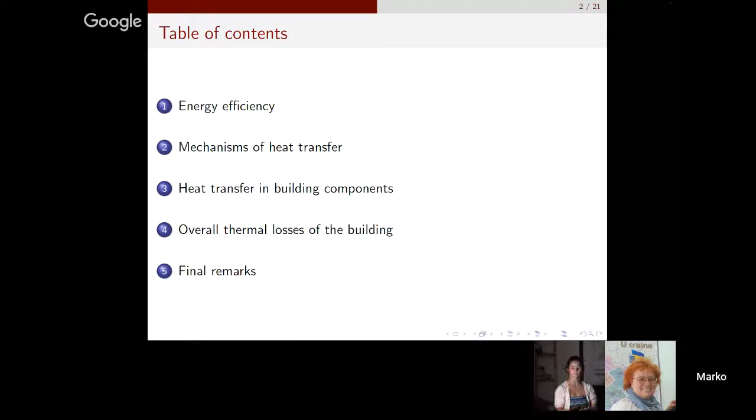In the third chapter, we will join these mechanisms of heat transfer together to understand heat transfer in individual building components. And in the fourth chapter, we will join these individual building components together to understand the complete thermal losses of the building. So we are building a pyramid, going from the basement to the roof. And in the end, in chapter 5, I will show you some final remarks.

Okay, so there are many problems related to energy. Some are very obvious. For example, if you are spending a lot of energy, you're also spending a lot of money. So big spending of energy means big financial cost.

The second problem is, of course, limited resources. This is a global problem. We all know that fossil fuels like gas, coal or oil are limited. So we know that we cannot keep spending at this pace.

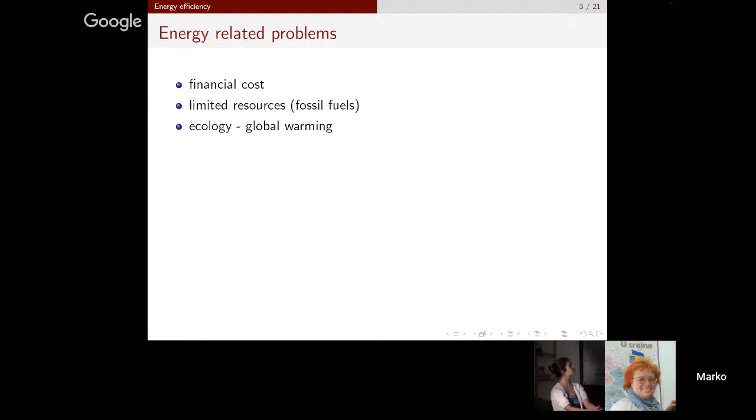And the third problem is ecology. A very popular topic today in the world is global warming. Of course, there is a lot of discussion and controversy about it. Some people, including the President of the United States, claim that this is a big hoax. But my counter-argument is that even if it was a hoax, there are still plenty of other reasons why we want to do something about spending energy and using other types of energy.

First of all, there is energy independence. I think this is an important topic in the European Union, and it is an important topic in Ukraine. And of course, don't forget that this energy efficiency also creates new kinds of jobs, especially local jobs—I will tell you about this later. Of course, it is also important that we get a better, cleaner environment.

I took the liberty to change this cartoon a little bit; I added the last one. Of course, you all know that there are certain countries which live from selling fossil fuels, and one of those countries is very hostile to Ukraine. So Ukraine has many things to be concerned about regarding the spending of energy.

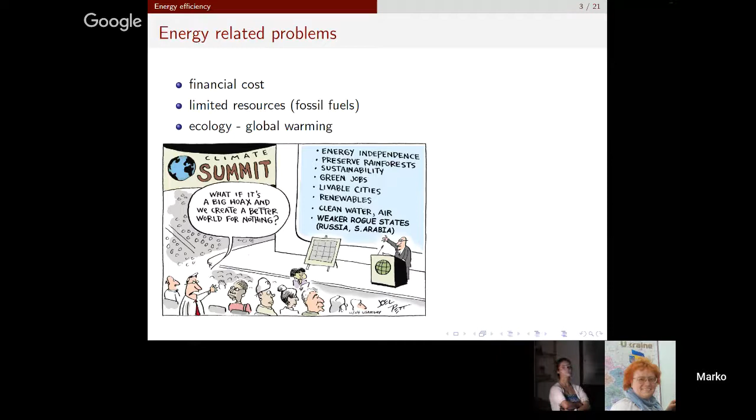Okay, so maybe I will provide you in the beginning with some solutions to energy-related problems.

The most obvious solution is new energy sources. We can use renewable sources like hydro, sunlight, wind. Of course, in the present technology, these sources might not be enough to replace fossil fuels. Then we have nuclear energy sources, fission, which we are already using a lot, but it is problematic because we have radioactive waste and don't know what to do with it. We also have fusion, but fusion is technology of the future. So these new energy sources are still, in many terms, future solutions.

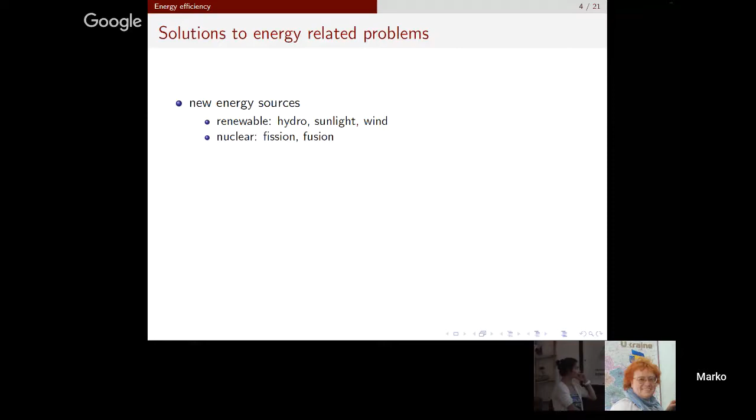So what are current solutions? What can we do today? Today, we can increase production efficiency. First of all, we can recycle materials. It is much cheaper to make copper from waste copper than from copper ore. So when you produce plastic, metals and everything else, using waste materials is cheaper and needs less energy than producing from basic sources.

The second possibility is reusing energy. A typical situation is power plants. We produce electricity, and these power plants have waste heat, which we can use to heat residential areas and houses. This is called cogeneration, combined heat and power, CHP. This is already common in the European Union, and I think even in Ukraine. A little more futuristic is tri-generation, because you can also use this waste heat to cool residential areas.

So what is the point? The point is that we use the same energy twice, to produce electricity and also to heat residential areas. The final point is consumption efficiency. We all know that if we use public transport, we use less energy than if we travel individually by car. This is a very common situation in Europe.

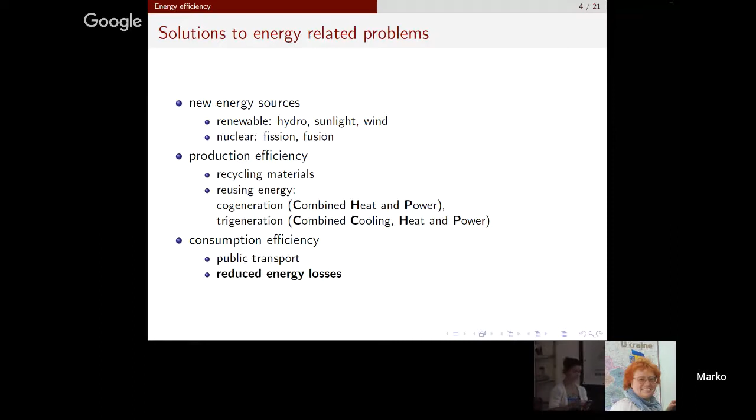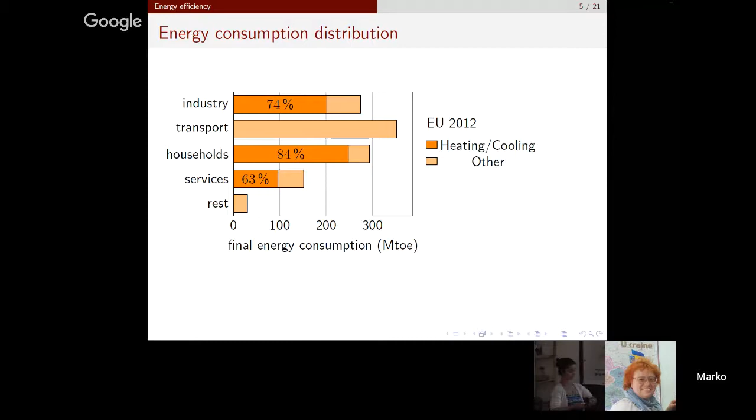Let's put some numbers into this discussion. This is data for the European Union, 2012, by sector. We see that most energy is used by the transport sector, then industry, households and services. This is not very surprising, but what you will find surprising is this: you see 84% of energy for households is used for heating and cooling. For industry, 74%. Services, 63%. If we add this all together, we see that at least 50% of all final energy in the European Union is consumed for heating and cooling.

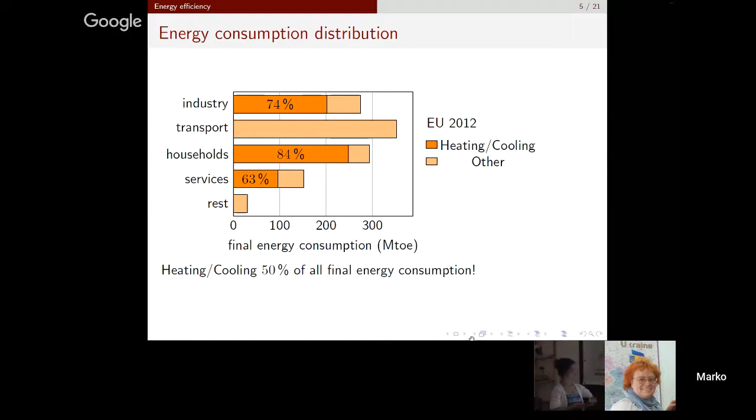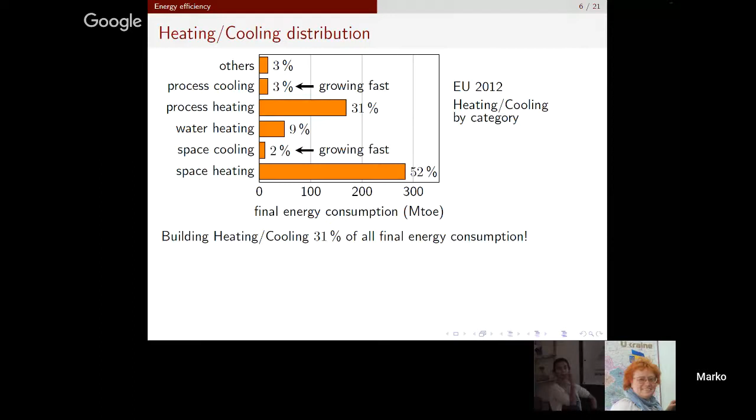If we add this all together, I would like to point out that space cooling and process cooling are growing very fast, because today air conditioning is completely normal and usual everywhere. About 20 to 30 years ago, it was not so usual. So people are starting to cool their houses, and space cooling and process cooling are growing very fast. All in all, building heating and cooling, energy used by buildings, is 31% of all final energy consumption.

So what is important here? Which are the important factors that can contribute to larger or smaller consumption? First of all, there is efficiency of the building thermal envelope — how much energy we lose through the walls. This is very obvious, and it is the most important point in our lecture.

The second is efficiency of heating and cooling equipment. You all have boilers or maybe furnaces to warm your water and buildings, and if these devices are old, they don't have high efficiency, so they also have to be replaced from time to time to keep high efficiency.

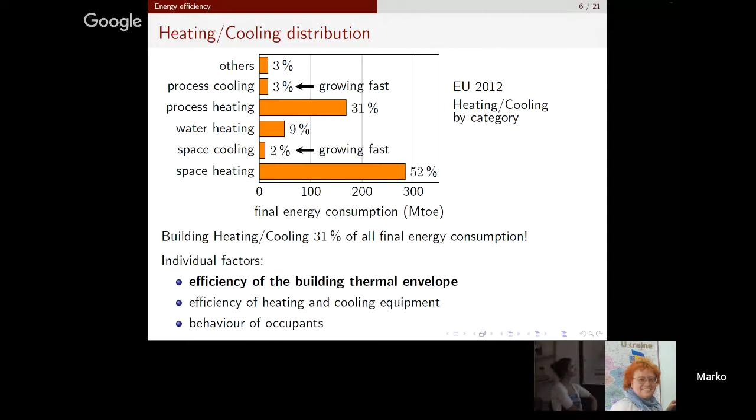There is also the behavior of occupants. If you reduce the temperature in your room or apartment by a few Celsius degrees, then you lose much less energy. This is not very popular, but it is also a possibility.

So now that I've described these problems, we will concentrate on losing energy through the walls, losing energy because of the house envelope.

Okay, I will not go into big theory, but I must say that there are three mechanisms of heat transfer. The first one is conduction. So what is conduction about?

The heat is transferred by particles, and these particles cannot travel. They can only oscillate. So when they oscillate, they collide between themselves, and by these collisions, the heat is transferred from the hot side on the left to the cold side on the right. And of course, where are the particles that cannot travel? In the solids, for example in the wall or in the glass, you have particles that cannot move. They can only oscillate, and there is only the possibility of conduction.

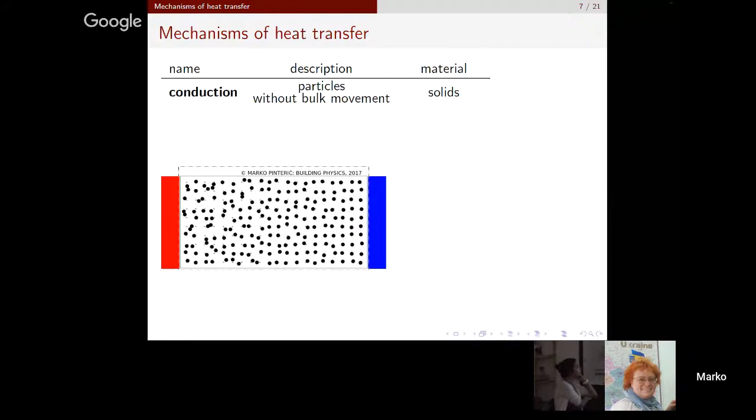The second mechanism is convection. Again, we have particles, but in this case particles can move, they can travel. For example, in this case particles are circulating within some kind of place, and they are transferring heat from the hot side on the left to the cold side on the right. Where is the possibility that particles can move? In fluids - in liquids and gases, particles can move. So this convection appears generally in fluids.

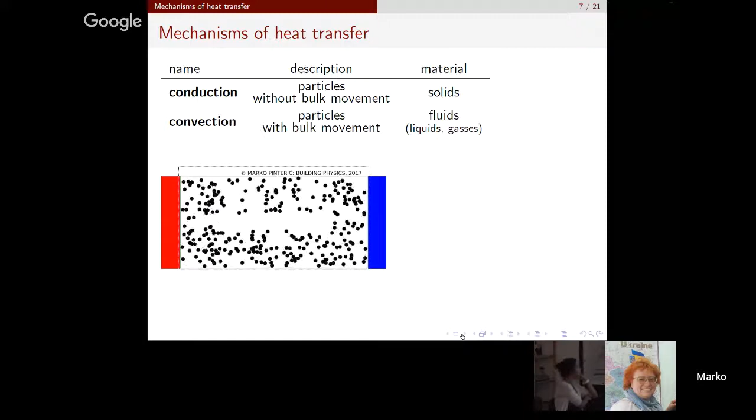And we have the third mechanism of heat transfer, and this third mechanism is radiation. So what is radiation about? Radiation is about electromagnetic waves, so particles are not necessary. Electromagnetic waves are emitted by practically all bodies in the universe. First of all, where can radiation appear? In empty space, because electromagnetic waves can travel very easily through empty space, either through vacuum or through air.

There is one important thing to know about radiation: because all bodies radiate - the sun radiates, we are radiating - it means that energy, or heat, goes both ways. Energy goes from the hotter side to the colder side, and energy also goes from the colder side to the hotter side. Electromagnetic waves are traveling in both directions.

Of course there is some difference, because bodies at higher temperature radiate more, and bodies at lower temperature radiate less. Also, as seen in this presentation, bodies with high temperature radiate short wavelength - you see these short wavelengths - and lower temperature bodies radiate long wavelength. Because bodies with higher temperature radiate more than bodies at lower temperature, this means that the net heat transfer goes from the hotter body to the colder body.

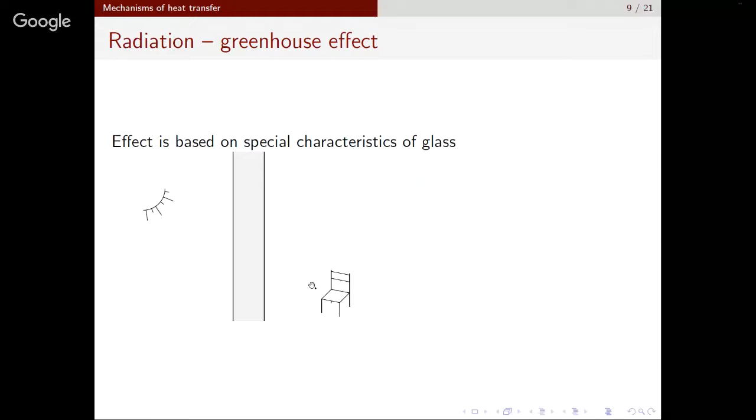So the greenhouse effect is based on a special characteristic of glass - we have glass here in between. A typical situation is, for example, you have the sun on one side of the glass and you have a chair which is in the room, and you put this chair next to the window. So what happens is we know that the sun has a temperature of about 5,800 kelvins.

So this means that the sun radiates short wavelengths, visual light. This visual light can go through the window practically unobstructed.

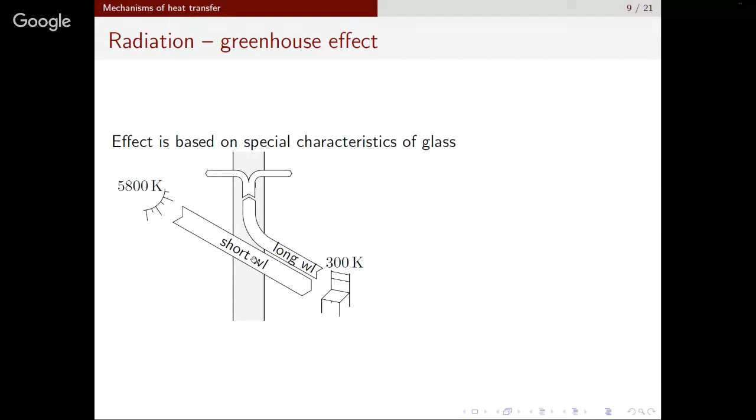On the other hand, we have a chair that has only 300 Kelvin. This chair is heated by the sun. If you put a chair next to the window, you will see that it heats up and gets a higher temperature, but it only heats up to about room temperature, which is about 300 Kelvin. So it has low temperature, and because it has low temperature, it only radiates long wavelengths.

And these long wavelengths cannot go through the window. They are absorbed by the glass, and part of this energy is returned back to the room, and part goes into the environment. So radiation can go practically unobstructed into the room, but energy cannot completely leave the room. Transfer is unobstructed only in one direction.

The same greenhouse effect is valid for the planet Earth as a whole. The function of glass is played by the atmosphere, or more particularly, greenhouse gases like carbon dioxide and others. This carbon dioxide functions like a glass: it lets radiation from the sun in, and it obstructs radiation from going from the Earth back to space. This is the real explanation of the greenhouse effect.

Okay, let's go now. We were introduced to the basic mechanisms of heat transfer, and now we will join these mechanisms to understand how heat is transferred through the wall.

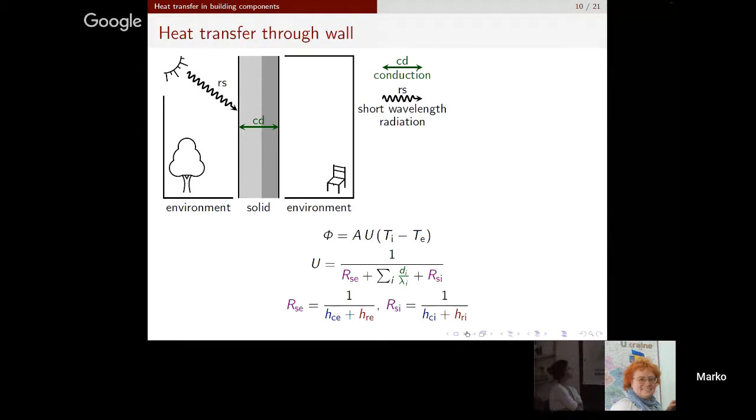Except for conduction, we also have short wavelength radiation. In the case of a non-transparent wall, short wavelengths cannot go through it, so they are stopped by the wall. More interesting is the long wavelength radiation: we have thermal exchange between the external environment and the wall, and thermal exchange between the internal environment and the wall. Finally, the missing mechanism is convection.

Convection appears only where you have gas—you have air inside and air outside. So convection can appear both inside and outside.

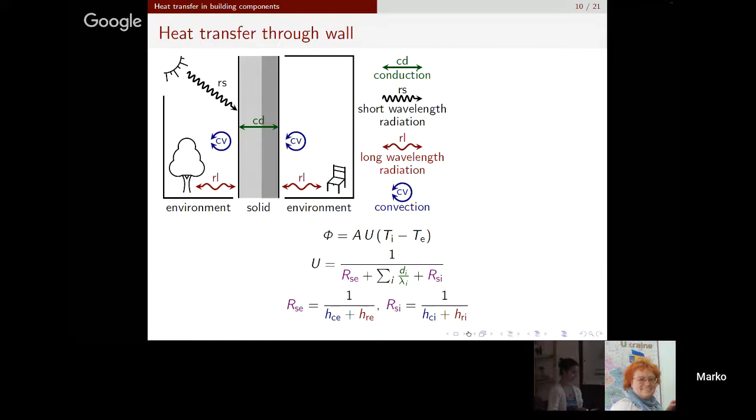A more interesting situation is the double glazed window. This is why I put the previous slide, because this is a little bit more complicated, but also more interesting. First of all, we start with conduction. Conduction can only appear in the glass - double glazed window means glass, and between the glass we have some space. And of course, we have the external environment and the internal environment.

Then we have short wavelength radiation as before. Unlike before, short wavelength radiation can go through the window and it can warm up the chair, for example, or the wall in the room. Then we have long wave radiation. Long wave radiation also appears in the airspace because it transfers heat between one glass and the other glass - heat between those two glasses is transferred by long wave radiation.

And finally we have convection. Convection also appears in the airspace, and because in the airspace we have some gas - usually in all windows we have normal air - this air is circulating between the two glasses, and by this convection, heat is transferred between the two glasses.

So this formula is changed a bit. You see, we have external surface resistance, conduction through one glass, and thermal resistance of the airspace. Thermal resistance of airspace is combined of convection and radiation. We have heat transfer due to conduction through the second glass, and we have internal surface resistance.

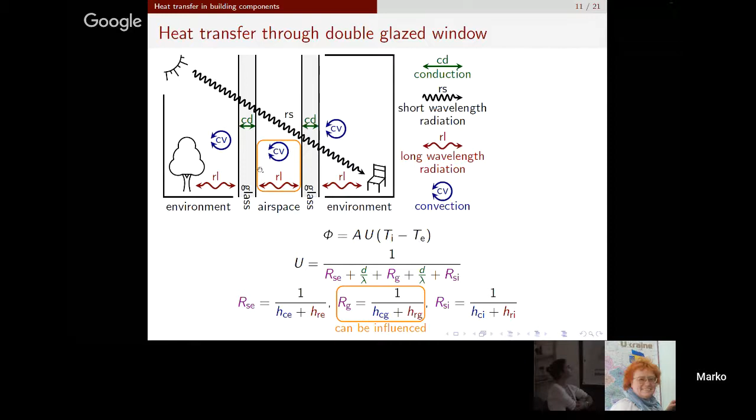Of course, the other possibility is that we add another glass - we can have a triple glazed window. I will talk about this at the end. So how can we reduce radiation and convection between the two glass layers? Let us see this in the next slide.

So this is the normal situation: we have two glasses, and air between the glasses. We see that thermal transmittance is about 2.8.

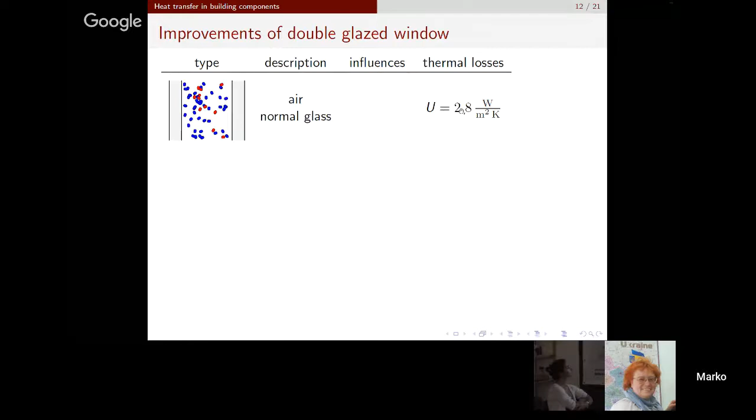What can we do? First, we can replace air with argon and other noble gases. There is big physics behind this, but let me try to explain simply: argon atoms are much heavier than air molecules, and argon has fewer degrees of freedom, so they cannot transfer as much energy. So by putting argon instead of air, we influence and reduce convection, and by replacing air with argon we get 2.7 for thermal transmittance.

The second possibility is that we put some metal coating on the glass - this here is metal coating. What is metal coating? It's a very, very thin, micrometer-thin layer of metal. You can still look normally through the window, but because of this coating, the long wavelength radiation will be completely reflected. This influences radiation. If we put this metal coating on one side, we get a thermal transmittance of only 1.7 - so we reduce radiation.

Of course, we can combine both - we can reduce convection and radiation - and we can get the typical window which is sold in the European Union.

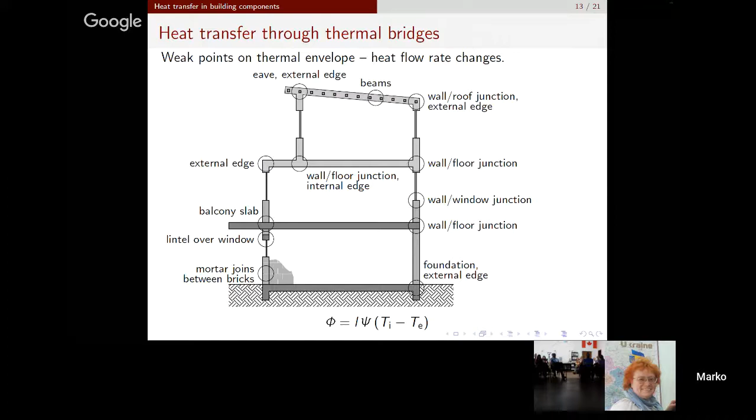And finally, we have the balcony slab. The balcony slab is a very, very big problem, and I will explain the problem of this thermal bridge in more detail. Now we will concentrate on this balcony slab.

So this is a cross section of the balcony slab. Let's say we have this reinforced concrete here, and we have walls from brick here and here, and we have insulation on the wall. What you see here is that there is no insulation. So if there is no insulation, heat will flow through this part which is not insulated - this is a weak point. Here we are losing most of the energy through this

reinforced concrete slab. You can see the effect of this thermal bridge on this picture. This is an interesting story because this building was additionally insulated just one year ago, and I took these pictures, and I was horrified to note that this retrofitting of the building was done very badly. You see they put additional insulation on the walls, but they still let the balconies

radiate a lot of energy. So you see balconies are very hot and they radiate a lot of energy, and of course because they are hot there is also larger convection. So we are losing much energy through these balconies because heat is avoiding the insulation - so we must do something about these balconies. This is not how it should be done. This is an example of how it shouldn't be done, and I will tell you more about these problems later in

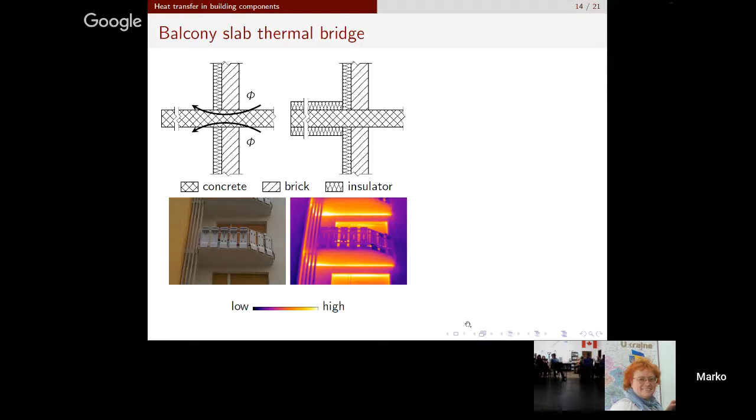What to do if you are only building a house? If you are building a house, then you can also use so-called load-bearing insulation elements. What is a load-bearing insulation element? This is actually an insulator, and there are steel beams that go through this insulation. So you have insulation and there are steel beams. Why steel beams? They are there so they can hold the balcony in place. And why insulation? Because now heat cannot avoid the insulation.

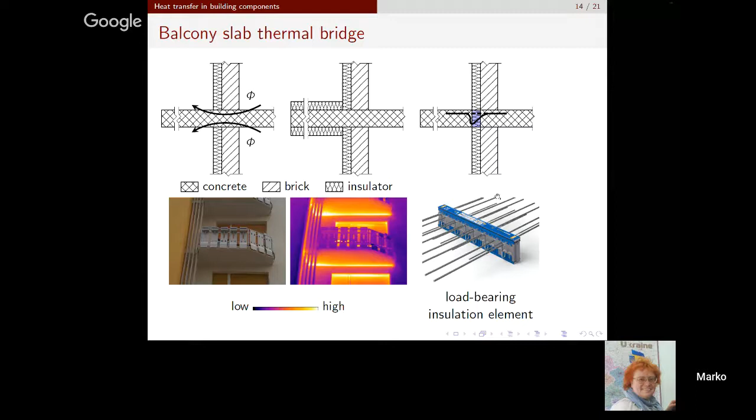So these things are very popular today. They were made in Austria - they are made in Austria and Germany, because Austria and Germany are the most advanced countries in the world regarding building physics. And unfortunately it is quite expensive, but this solution provides such savings in heat losses that I believe in the long term you gain money, not lose money, by using this load-bearing insulation element.

So now we were talking about individual parts of the building, and now the third part is we want to know the complete losses of the whole building. So we will see the individual contribution to the total thermal losses of the building.

So this is one example of a building. You see that we have different spaces here. We have conditioned spaces - these rooms are heated and cooled. And we have, for example, a garage - we are not heating and cooling the garage, so usually this space is called an unconditioned space. And of course this dashed line is the thermal envelope.

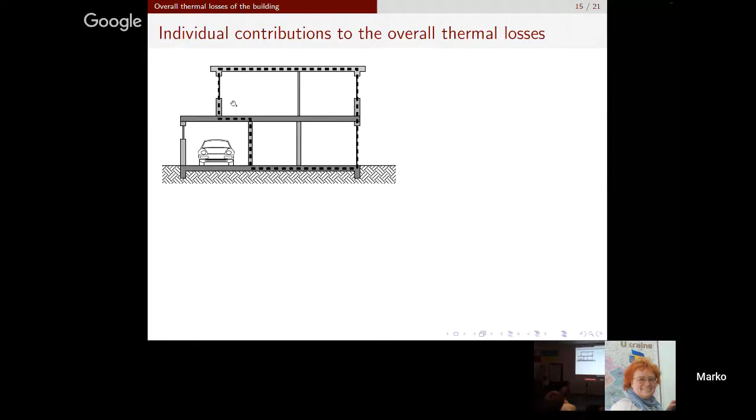By definition of the standard, it should be here. So what are the individual components of the thermal losses?

But direct thermal losses are not the only losses. We also have thermal losses through the ground, which also shouldn't be neglected. These thermal losses are much more difficult to calculate. Why? Because we have a third temperature. We don't have only internal temperature and external temperature, we also have temperature of the ground. So it is not so simple to calculate these losses to the ground, and I will not show you the formulas.

Okay, and then we have thermal losses through the unconditioned spaces. This is also difficult to calculate because we have the temperature of the unconditioned spaces. So, for example, you know that in a garage, the temperature is usually lower than in the rest of the house.

And finally, and this is a very important part, we have thermal losses through ventilation. And this is something that people often do not think about. So what is thermal losses through ventilation? What you do is you open a window, and when you open the window, the warm air from inside goes out, and you are getting fresh air, which is cold, from outside. So where are the losses? The losses are that you must warm up this fresh air which is coming from outside, to the temperature of the room.

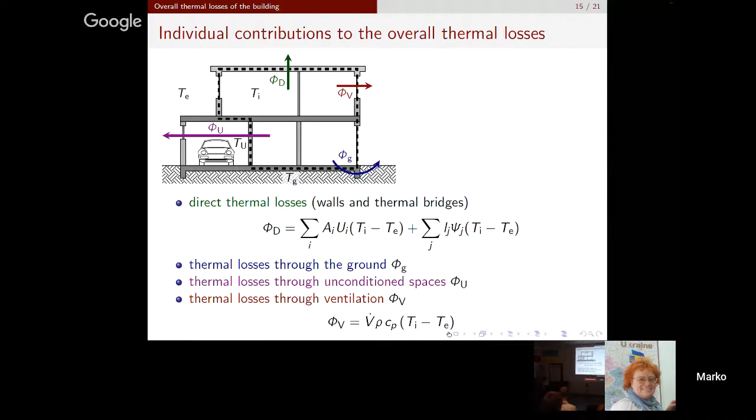So obviously these losses are proportional to the temperature difference, and they are also proportional to airflow, and of course they are also proportional to the thermal capacity of the air. So it is, from a physical perspective, a very simple formula. We will talk about this, the thermal losses of ventilation, later. So please remember this, this is very important. These thermal losses through ventilation are a very important part of the thermal losses.

Now I will show you two practical ways how you can improve efficiency, which are not directly connected to the insulation. First of all, we can use heat pumps. Heat pumps are usually a big mystery. People do not know really how they work, but they are not so difficult to understand.

So to understand this concept of heat pump, I will show you the difference between a typical boiler or furnace on one side and a heat pump. So what is the difference? We start with what you know best. This is a boiler or furnace. So what is the point of the boiler or the furnace?

You are using fossil fuel. You are burning fossil fuels, and by burning fossil fuels, you create heat. So what are you actually doing? You are changing the type of energy, from chemical energy of the fossil fuel into heat energy. And of course, usually this efficiency is close to 100% if this boiler or furnace is new. Of course, if it is very old, efficiency starts to drop. This is very important to know, that efficiency is slowly dropping as these devices are aging. So for example, if you put 3 joules of gas in, you get 3 joules of heat out. So you have 100% efficiency.

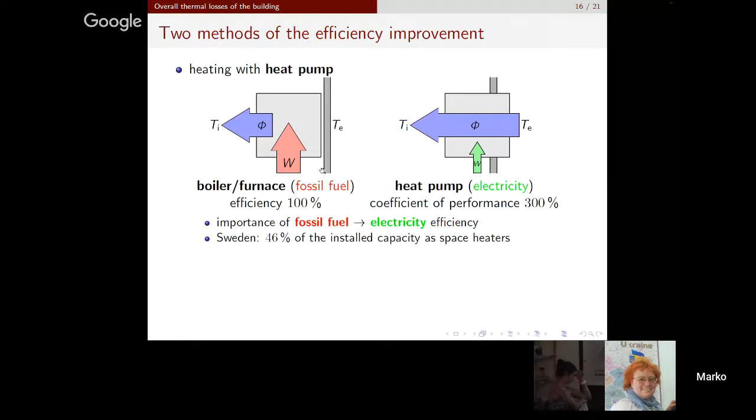Heat pumps make sense because in Sweden, 46% of installed capacity as space heaters is through heat pumps. So heat pumps are an important part of this mixture of different solutions to our problems.

The next important thing is the so-called recuperator. I will tell you how we can reduce losses due to ventilation. Instead of opening the window and letting hot air go out, we want that air to give some heat to the cold air coming inside.

Instead of opening a door or window, we force this air to go through a pipe. Here inside is hot air from inside, going through the pipe, and in the end it gets out. And we have fresh air from outside going through another pipe inside, and it is warming up.

Why is this cold air warming up and this hot air cooling? Because these two gases are in thermal contact. The hotter air from inside is giving heat to the colder air that is coming inside. This recuperator is the so-called heat exchanger.

This is a more clever word for the recuperator. Air-to-air heat exchangers have an efficiency of about 60 to 80%. So 60 to 80% of energy can still be recovered by recuperators.

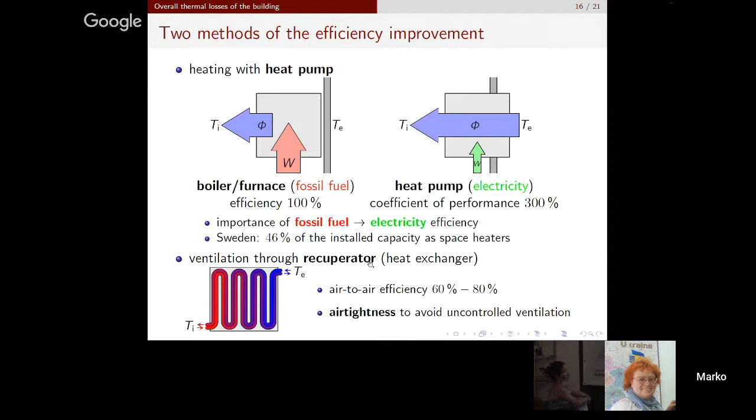So now I've told you about some interesting things that can improve energy efficiency of our building. Now we will put all these things together in building a passive house. But before I use these different devices and mechanisms we've learned so far, I must first define what is a passive house.

Maybe you heard about passive house. Passive house is a very popular term in Europe, and I see that not many people really understand it. I know that my colleagues, civil engineers, don't understand it. So maybe it is not a bad idea that we try to understand this concept of passive house.

The concept was made up by two professors, one from Sweden and one from Germany, because Scandinavia and Germany, as I told you before, are the most advanced countries regarding building physics. They asked themselves: we want to make some efficiency standard, a building efficiency standard that will be true for all the world. But how can you do this?

Because, you know, in Italy you have a hot climate, you don't need a lot of energy for heating. And on the other side you have, I don't know, Finland. In Finland you need a lot of energy for heating. So can we make a universal efficiency standard? Is it possible? And they found a way.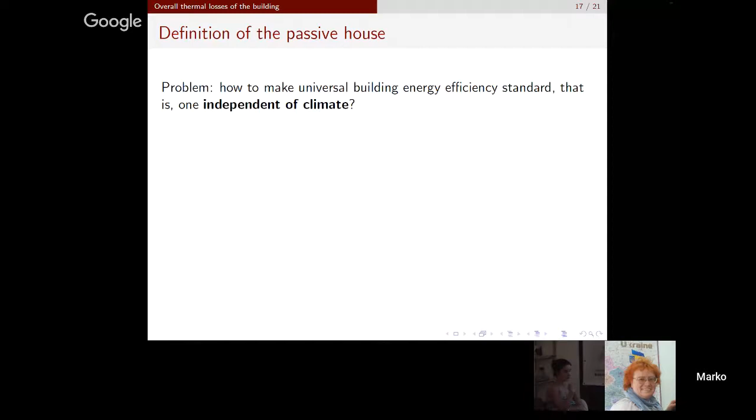Now I will show you the definition. A passive house is a building for which thermal comfort can be achieved solely by post-heating and post-cooling of the fresh air mass, which is required to achieve sufficient indoor air quality without the need for additional recirculation of the air. Very complicated, but it is not so difficult if I explain it in my own words.

So let's put some numbers into this. It is assumed that the minimum airflow rate is 30 cubic meters per hour per person, so we have enough fresh air for living.

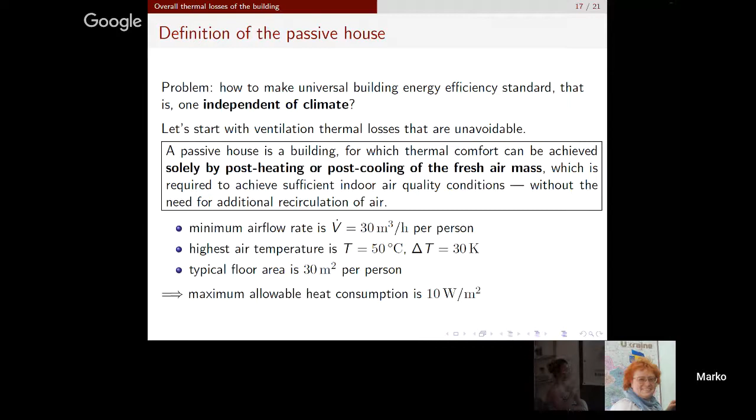It is assumed that air can be heated for about 30 kelvins. Why 30 kelvins? When air goes through the recuperator, it is heated almost to the temperature of the room, let's say to about 17, 18, 19 Celsius. And you cannot heat it above 50 Celsius, because above that temperature the dust in the air starts burning, and you get a smell. So you cannot go beyond 50 Celsius, which means you can only heat the air by 30 kelvins.

The third assumption is that a typical floor area is 30 square meters per person. This is normal for Germany and Scandinavia, but a little bit a lot for Slovenia or Croatia, because we are accustomed to smaller houses and don't have as much money. This is more of a cultural assumption, not really universal for the whole world.

But let's stick with this definition. So if we put these numbers into the formula I showed you a few slides before, we get that the maximum allowable heat consumption is 10 watts per square meter of the house.

And this is very small, really small. You will see that typically you have 100, or even a few hundred watts per square meter in a typical house that is not insulated well. So 10 watts per square meter is a very small consumption.

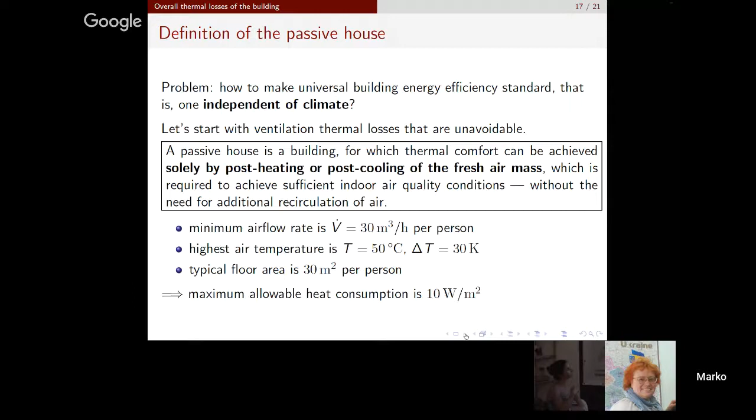So the question is, is it possible to do this? It is possible if we use all the knowledge I've shown you until this point. So let's start with an empty house, and we will design it to become a truly passive house. So what must we do?

First of all, we must have low thermal losses. This is very obvious, we must lose a very small amount of heat. First of all, we must have good insulation, thick polystyrene or thick mineral wool layers on the walls everywhere. Then we mustn't have any thermal bridges, so we must not have any space without thermal insulation, for example. Let's put it this simple way.

And finally, in a passive house, we use triple glazed windows. Making the glass thicker makes no sense, as I already told you, but adding another glass layer does make sense. Why? Because with a triple glazed window, we have 2 air spaces. The air space is the key. 2 air spaces are better than 1 air space. 3 glasses is the same as 2 glasses, but 2 air spaces are better than 1.

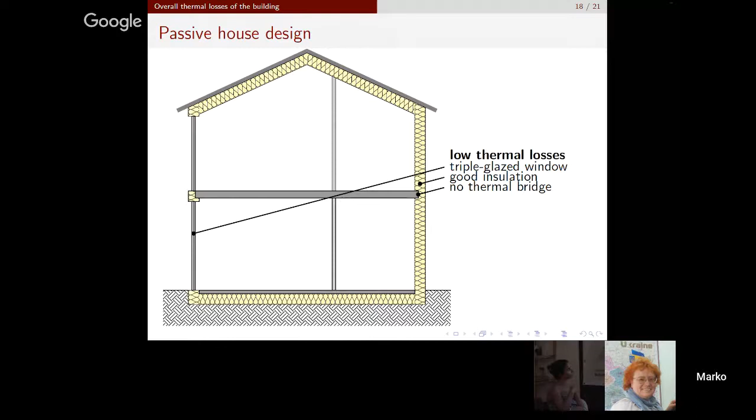The second thing is we need efficient ventilation. I already told you, we need recuperators, we need air tightness, so no air goes out or in uncontrolled. We need a recuperator: outside air goes through the ground and then to the recuperator, where it is heated to about 18 Celsius, then post-heated to 50 Celsius, and then let into the rooms.

So you see, you don't need radiators because the air is heating the building. You don't need a water system for heating, it's an air system that heats the building. So you don't need one whole system, this is also a possible saving. And you have exhaust or waste air, which goes through the recuperator and cools down before leaving.

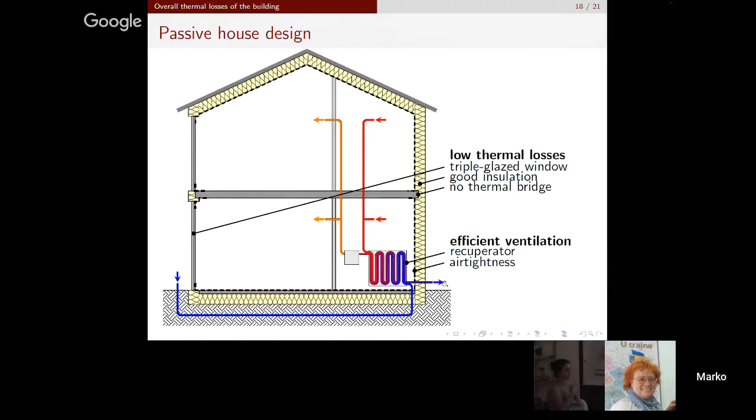And finally, we need efficient heating. First of all, we will heat the air not with a furnace, but with a heat pump. And of course, we need solar gain, what we need is the greenhouse effect, we are heating houses with the greenhouse effect.

We have big glassy walls or big windows facing south, because that's where the sun is. Of course, in Australia they need the north direction, but in Europe, in Ukraine and the European Union, we want big glassy areas facing south, so we get additional heating from the sun.

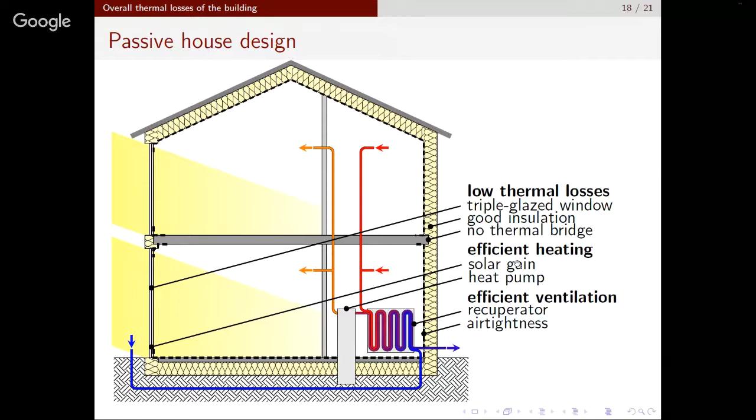Okay, so this was the technical part. I will finish my lecture with some final remarks. I will tell you about some legislative incentives in the European Union, which have been made in order to reduce thermal losses in buildings.

The problem was recognized, of course, first in Germany and Scandinavia, and then through the European Union it is recognized as a very important problem in the whole European Union. This is also important because Ukraine, as far as I know, wants to come closer to the European Union, so it is important that you know something about the trends in the European Union.

First we have a directive, 2010-31, on energy performance of buildings. What does the directive say? It says that member states must set up minimum energy performance requirements. Not very smart, but of course, people are forced to put more insulation on the houses. If you want to have a building permit, you must have enough insulation.

By 2021, all new buildings should be nearly zero energy buildings. All major renovations must be done with an energy performance upgrade. So if you are doing renovation, why not put an additional layer of insulation? This is obviously a logical step.

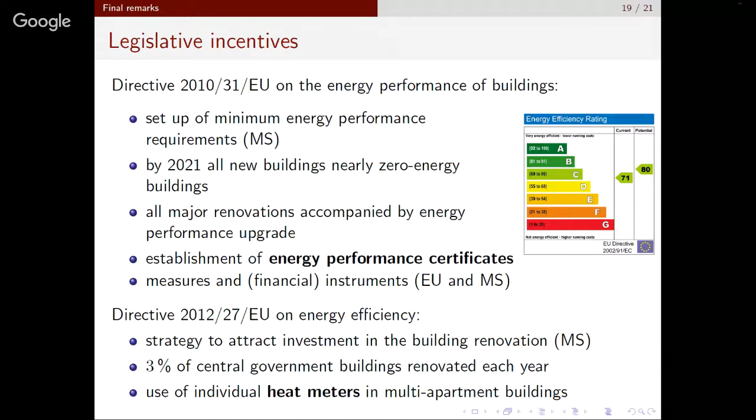So here we have a chance to do something for the better. And of course, maybe this is less interesting, but there are different policy instruments. We have loans, we have subsidies, we have grants, we have fiscal incentives. So there are many financial types of public funding into building improvement.

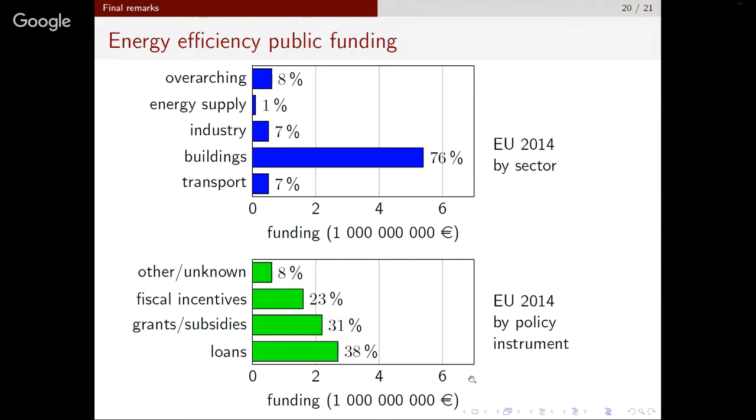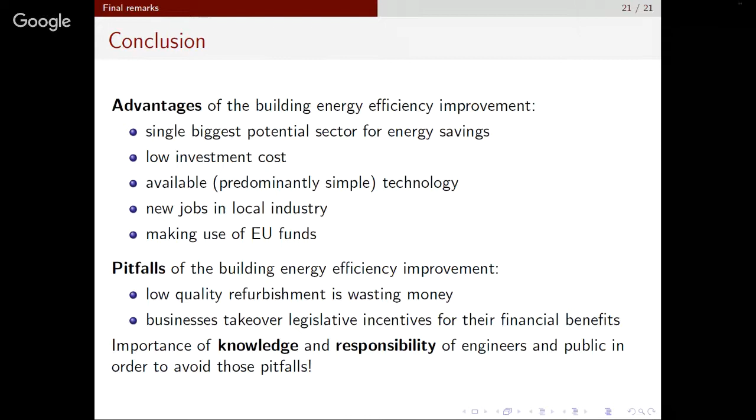Okay, I think this is all. I would thank you for your attention. I hope I was understandable for you all.